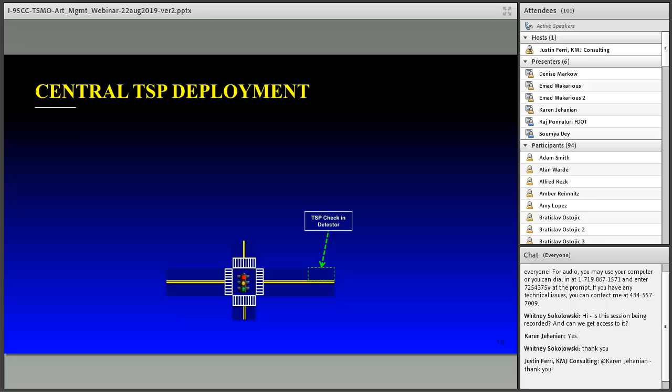The benefit of NYCWiN, which is a wireless network for TSP, is that it eliminates the need for instruction changes to the traffic controller, requires only GPS on the buses, and there's no real cost to implement TSP citywide.

Okay, I'm going to go through this little by little. We have the TSP check-in detector for each intersection. First, we have the TSP check-in detector, then the TSP check-out detector.

When the bus approaches the intersection, every bus, capable with GPS, connects with the transit server, which is a transit management center, via 4G, and says I'm here, away about whatever distance, 200, 300 feet from the intersection. Then the transit server connects with TMC, DOT TMC, and sends a request for TSP. TMC sends acknowledgement to MTA Transit, and during this process the DOT server sends through NYCWiN, connecting with our controller, which grants the request for either early green or extension green. All this happens within 2 seconds, maximum 2 seconds.

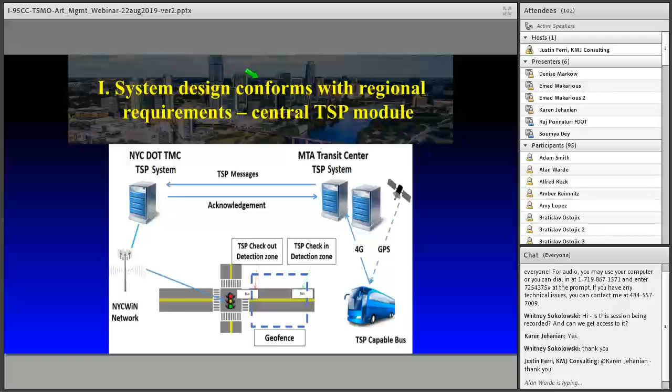So once the bus clears the intersection and clears out, as you see here, this is the full picture of all what I said before. All this happened within 2 seconds.

Okay, so moving forward here. We built a system engineering with a portion of New York City's sub-regional ITS architecture covered by the Transit Signal Priority Project. As you see highlighted in yellow, that portion we built in the system here, covering the TSP subsystem.

There's more detail here in the package describing the communication between New York City MTA server, New York City, and TMC. I'll have more details if anyone needs a link. We have a link for the whole system engineering project on the website.

Let's move forward. That's a little snapshot of a 60-second cycle length.

We can talk about the policy we built in-house. It starts from number 1 through to screen number 7. First, we start with TSP parameters and how we implement that.

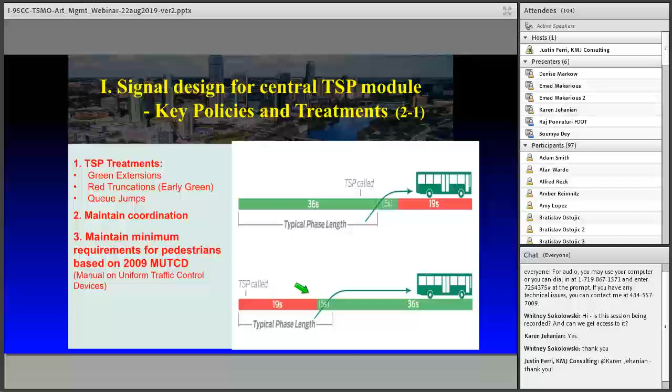There's a sample for a typical intersection with 60-second cycle length. The first graph shows extension green for 5 seconds, and the lower graph shows early green for 5 seconds. We maintain coordination and of course maintain minimum requirements for pedestrians based on 2009 MUTCD.

We also define the detection zone for each intersection. Those switches also play into the policy. If any roadway has 2 directions, it's first come first serve, and of course the TSP duration varies by intersection and time of day.

Okay, we can go quickly through the process of how we built the network and how we process the TSP. We start with network data, starting from aerial photos, physical inventory, and so on.

All of this is listed on the left side, and we also have bus data listed on the right side. All of this is important to build the network. So let's move forward.

Which software do we use? We use Synchro and we use Aimsun. Both are very important software packages we use for our project. Mainly Synchro, which builds the network.

We build an existing model, measure the level of service, queue, and all these factors, and at the same time we build in Aimsun.

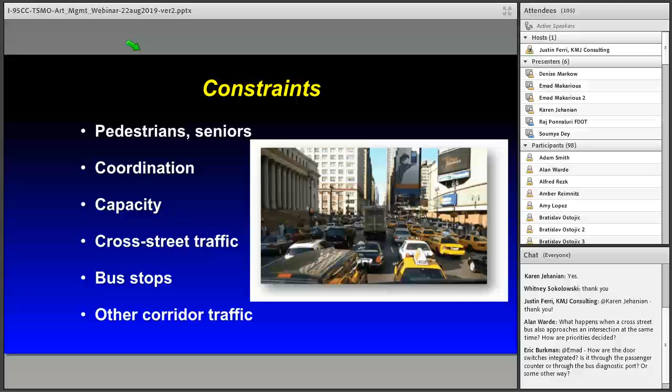As you know, New York City has a lot of constraints: pedestrians, seniors, coordination capacity, cross-street traffic, bus stops, and other corridor traffic which intersects with the main corridor.

After we process through the software packages, we have before-study and after-study reports. The before study is mainly the outcomes from the software, either Synchro or Aimsun.

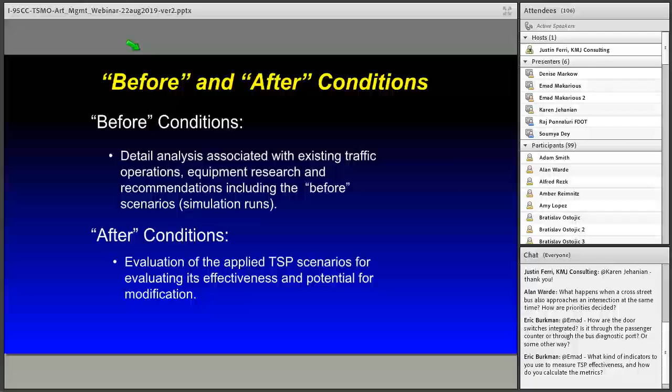For the after study, we do real data collection from the field based on bus travel time, and basically we turn TSP on and off during this process. It varies between 4 to 8 weeks of study during Tuesday, Wednesday, and Thursday, every week. After that, we evaluate the benefits from implementing TSP.

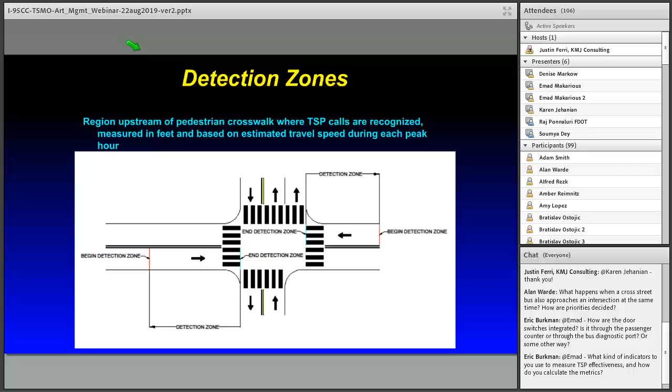We move forward here. That's a simple example - the detection zone is measured in feet based on estimated travel speed during each peak.

Let's briefly explain how the bus approaches. For each approach along the route, for each signal in the system, there will be a defined area called the check-in zone and the check-out zone.

So when the bus enters the check-in zone, it sends a request to the TMC saying, 'I'm here, I need TSP.' Within that detection zone, if due to traffic conditions the bus is still inside, it sends another request saying, 'I need a TSP extension.'

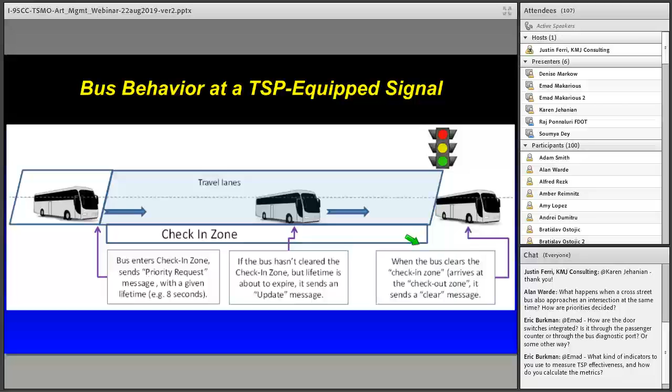Once the bus clears the detection zone, it's the check-out zone, so it sends a message to the TMC saying, 'I've cleared.' That means the TMC ends the extended green phase. This whole process happens within maybe 7-8 seconds.

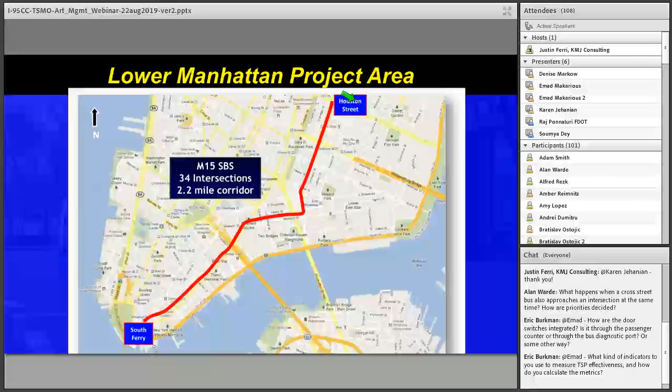The first project we did was in Lower Manhattan, about 34 intersections over 2.2 miles. It starts from South Ferry and ends at Houston Street - again, 2.2 miles.

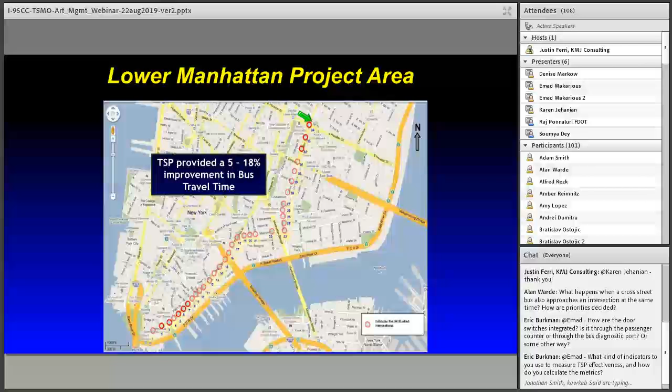We saw benefits between 5 to 18% improvement in bus travel time, over that same 2.2 mile stretch. We implemented TSP for AM, midday, and PM - about a 3 hour window for AM, about 2 hours for midday, and a 3 hour window for PM.

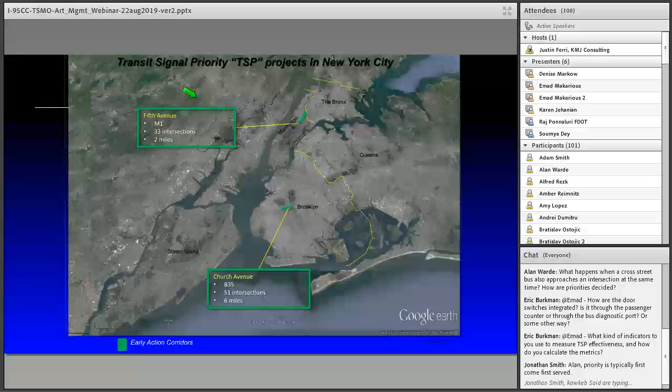This is another snapshot of early action TSP. We have another methodology we're using and testing right now. We've implemented it on 2 corridors shown in green.

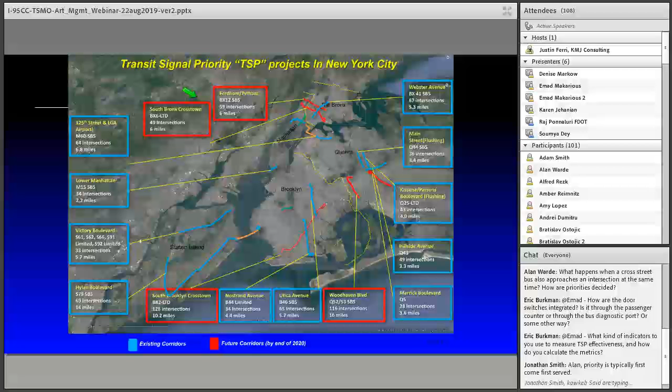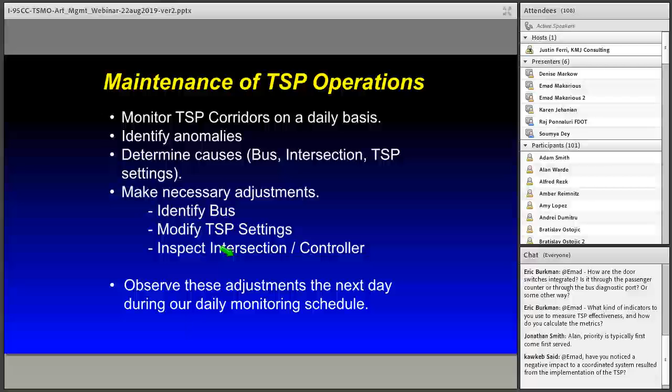We can touch base in the next couple of slides about how we maintain TSP operation. We monitor TSP corridors on a daily basis, determine if there are any issues regarding the buses, whether we need to modify TSP settings, inspect each intersection within the corridors, make changes, and we immediately see the results the next day.

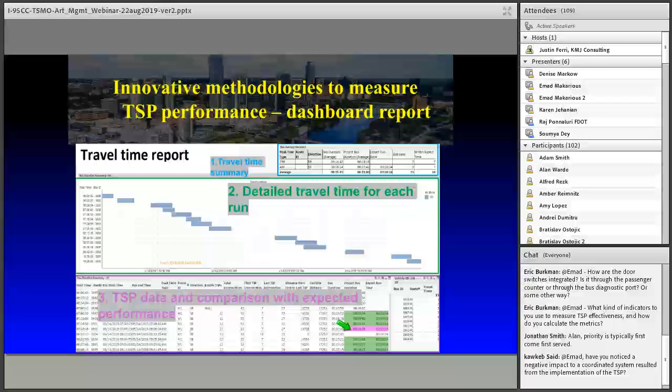How we see that - we check TSP data and compare it with the expected performance. And if we see something unusual like pink, we have to go and inspect that and see what's the issue with the controller or from the buses and so on.

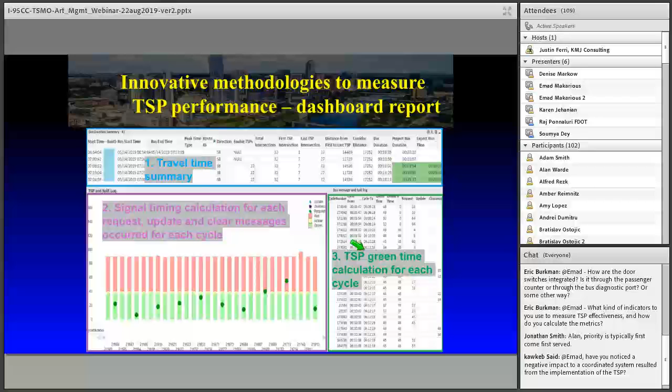So we're talking about sometimes data with over a million records. We have a consultant with a workstation. We monitor that on a daily basis, and how the TSP calculates. Here's also another report: TSP green time calculation for each cycle.

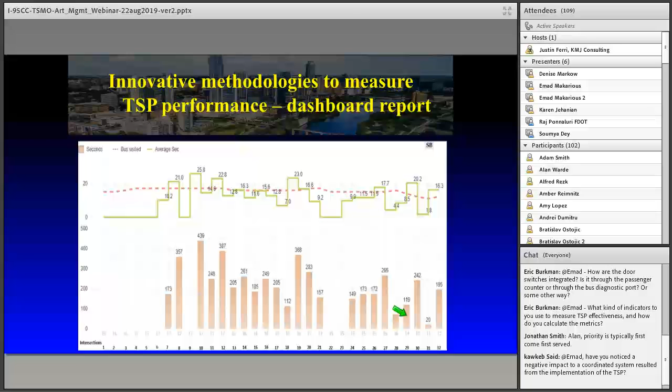Again, there's another snapshot of the report, as you see here, comparison between each cycle and each record, what happened for each record here. That's of course when the TSP was active, which was between 7 to 10 a.m., typically, and 12 to 2 o'clock, and between 4 to 7 p.m.

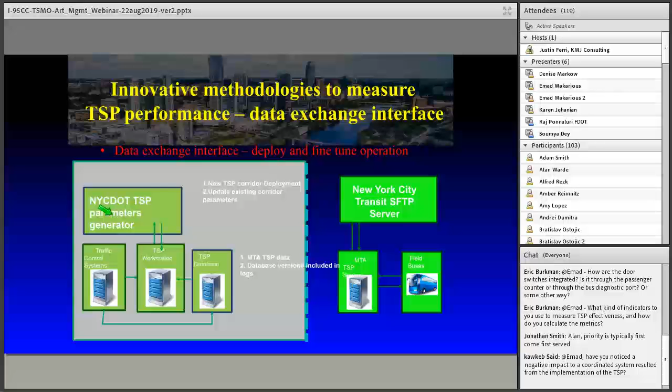That's another snapshot: TSP performance data exchange interface, and as you see here, how the communication between TMC - right, New York City TMC - and New York City Transit server, how the communication between the servers works. So it's very clear here.

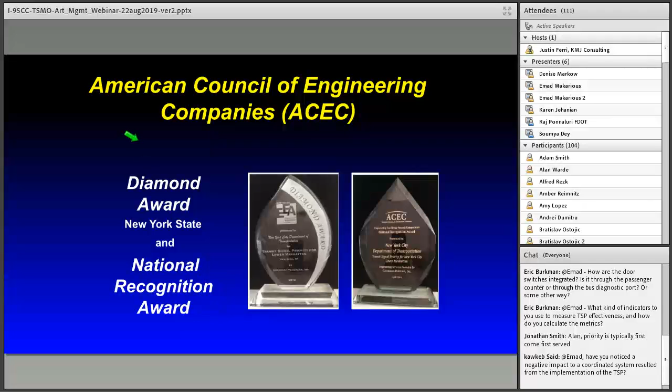And we see the benefit, as I mentioned before, varies between 5% to about 25%. It depends on the traffic, and also depends on the time of day.

And that's one of the awards we have, back in 2015, for American Council of Engineering Companies, and there's another from ITS New York, back to June 2015. With that, I finish my quick presentation, and thank you everyone for listening.

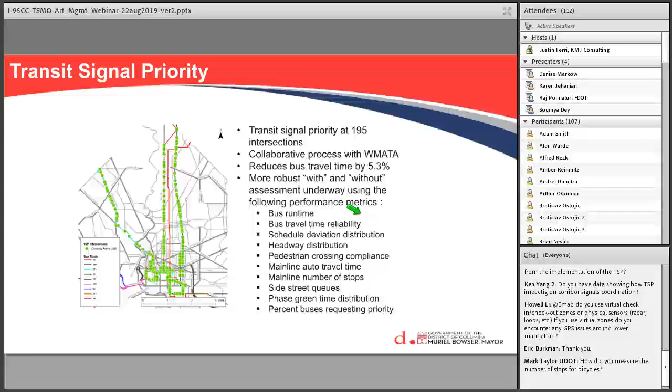So transit signal priority, I'll just touch on this because Emad has gone into great detail. So we have transit signal priority along 195 different signalized intersections. It's a collaborative process with our regional transit operator. And overall, we did some preliminary analysis and saw that our bus travel times reduced by about 5.3% along these corridors. And we are in the process of doing a more robust analysis.

And these are some of the metrics that we are using: the bus run time, travel time reliability, schedule deviation, et cetera. The other thing that we tested a few years ago was how effective is adaptive signal control in a dense arterial environment. And we tested this along 3 different corridors in Washington, D.C., Rhode Island Avenue, New York Avenue, and Pennsylvania Avenue. And so we did a before and after analysis.

And what this basically showed in a nutshell is that there were limited travel time benefits on the main line, but the levels of delay on the side streets and the queues were really unacceptable. And then there were issues with confusion with pedestrian crossing times and all of that. So we kind of shelved the idea and reverted back to our pre-timed signal operation.

So now let's talk about the second bucket, the lane management strategy. So the first thing that I wanted to talk about is a framework that we put in place for assessing the effectiveness of our current rush hour restrictions. So typically, these rush hour restrictions were put in place a long time ago. The travel patterns in the district have changed. 15, 20, 25 years ago, the district was mainly a destination. There was not much activity happening in the district, but now things have changed. So it's a very vibrant community.

So we wanted to see whether the rush hour restrictions that were put in place a long time ago are still viable. And if not, what kind of framework can be put in place to make an assessment on a corridor by corridor basis? So when you do the evaluation, it's basically a trade-off between mobility and access, right? So if you provide more lanes during rush hour, your mobility is going to increase, but at the expense of maybe access to your adjacent land uses.

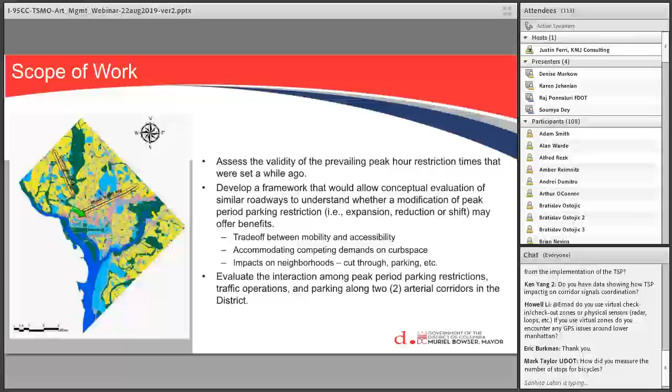So if you are not allowed to park on the curb lane, then the access to the adjacent businesses and other activity centers gets reduced. And it might have a spillover effect onto neighborhoods that abut these corridors, right? So you might see things like reduced parking availability for the residents. If the restrictions are too stringent, you might start seeing things like cut-through traffic. So those were the kinds of things that we wanted to bring into the evaluation process. And we evaluated 2 major corridors, Connecticut Avenue and Rhode Island Avenue, to kind of assess and create the framework.

So it was a 5-step process. We assessed the existing conditions, established the need for changing the restrictions, if any. We wanted to establish what acceptable operational thresholds are when we do the evaluation. We established how much we need to shift the restrictions by, if any. And then the other big piece is once we decide on a new time frame, if you will, for the restrictions, how do we deal with the transition point for the sake of consistency across the corridor. So this is kind of the basic framework.

So the existing restrictions during the morning rush hour are 7:30 a.m. to 9:30 a.m. So we did the analysis in 30-minute chunks to establish what the existing conditions are in terms of operations. And then based on the need, does it make sense to pull the rush hour restrictions, or in other words, start it earlier, or do we push it to a later time? So is 9:30 still good? Do we need to go to 10? Or the other question is if we pull it back to around 9 o'clock.

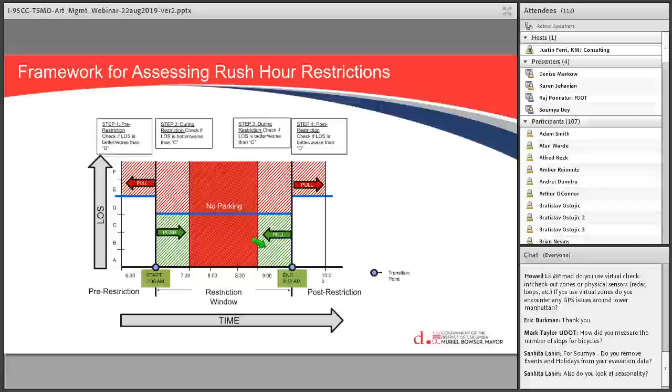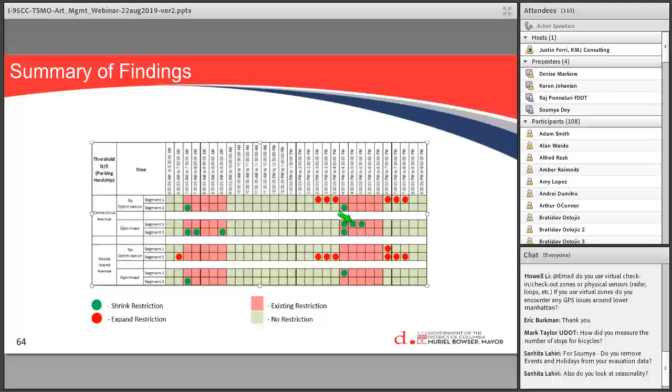But once you optimize the signals, then you open the possibility of probably reducing your restrictions during the PM rush hour for segment 1. So that's the kind of analysis we went through. And based on the analysis, we tried to create some policy framework, right? It takes into account what the different thresholds could be for our analysis, the availability of transportation, the potential for neighborhood cut-through traffic, and the parking supply and demand in the neighborhood. And then based on that, we had some policy recommendations on what strategies we could put in place.

So that is it in a nutshell. We have a TRB paper on this, and I can direct you to our final report if somebody wants more information on this project.

So the second one that I wanted to talk a little bit about is the bus-only lane project, the pilot that we launched this summer. It was done on H and I Streets in Northwest DC. And what's interesting is that it's a very heavy bus corridor between H, I, and K Street. They account for about 40% of the bus riders in Washington, D.C. So very heavy corridors. H and I are one-way pairs. And so we implemented rush hour bus-only lanes on H and I Street.

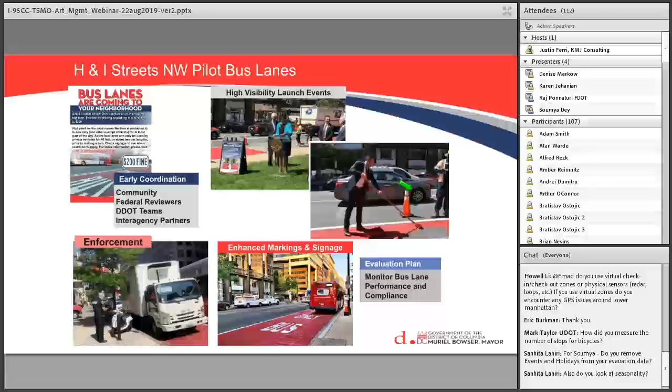And we had significant outreach. The mayor kind of launched the project. We coordinated with our enforcement partners. So it was a very high-profile project. And again, remember the number that I gave you, that by 2032, we want to get to 75% non-SOV mode. So these are the kinds of strategies that we are putting in place to incentivize other modes of transportation.

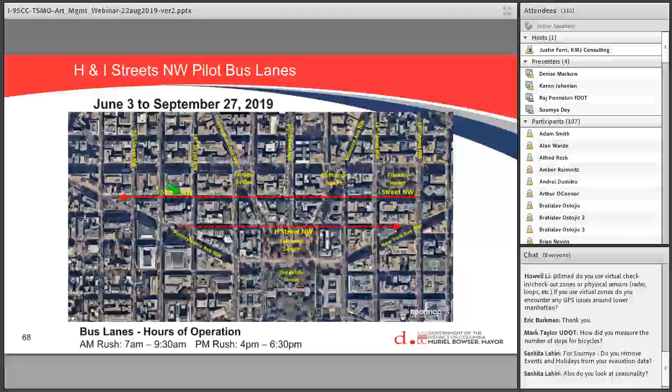And the preliminary results are a mixed bag. For I Street, especially during the PM rush hour, there has been significant improvement in bus operation, about a 17.9%, 18% improvement. So that's pretty significant. But what was surprising was that on H Street, the bus performance, the travel times and speeds actually decreased. And then we started peeling the different layers of the onion, and we saw that what was causing this was heavy right turn movements, especially on 15th Street and 17th Street near the White House, that was impeding the buses on the bus-only lanes.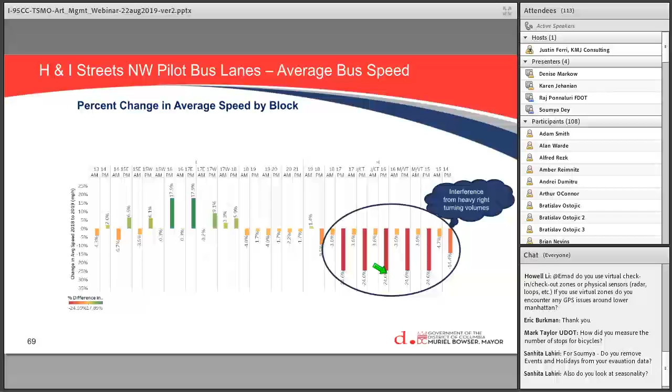What was interesting is, so what changed, right? So before the bus-only lanes, the bus operators knew what the patterns were, and they were using the second lane to make that through trip. But with the implementation of bus-only lanes, they had this mindset that they needed to stick to the bus-only lane, and they were getting caught up with all the right turns. So there are some strategies that we are trying to put in place to alleviate that problem. And in terms of travel time reliability, I think I Street did pretty well, and the reduction in travel time reliability, or the standard deviation, was mainly driven by the friction with the right turns.

So the lessons learned, the key issue that we are trying to resolve right now is the right turning issue. There was an informal bus layover on one of the bus lanes, so we are in the process of relocating that. And then obviously, enforcement is a big piece of this. So we are trying to minimize the encroachments on the bus-only lanes by vehicles that are not supposed to be there.

So very quickly on reversible lanes, we do have reversible lanes in Washington, D.C., but we are restricted in terms of what kind of signage we put up. We are not allowed to put up overhead lane control signs. So when I shared the experience of Washington, D.C., you have to take into account some of the constraints under which we have to operate our reversible lanes.

So we looked at reversible lanes in terms of three basic metrics. One was utilization of existing infrastructure, right? So you have 4 lanes, you have 7 lanes, you try to reallocate the pavement or the capacity based on your demand. So from that perspective, I think reversible lanes do very well.

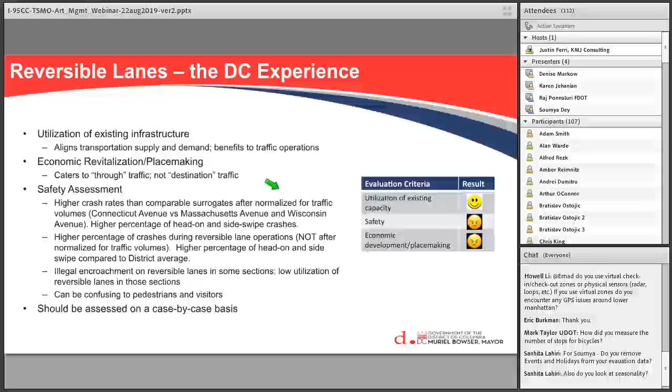But the biggest drawback was because of the constraints that we have in place in terms of sign placement, the safety of reversible lanes was not as high as compared to surrogates or a control corridor. They had a higher crash rate. So again, we have an ITE paper on this. I will be happy to direct you to that if you want more information on reversible lanes in an arterial setting.

And then the last strategy that I wanted to elaborate was curbside management. I know I'm short on time, but I'll quickly talk to you about a curbside dynamic pricing project that we did in the Chinatown Penn Quarter area. What we did here was use technology, economics, and advanced analytics to improve the on-street parking experience for customers. And the way we did that was by pulling 2 different policy levers. The first one was the duration for which you can park, and the second one was the amount of money that you need to pay to park. And we provided real-time parking availability information to customers so they know where the open parking spaces are.

So when we started out, we started with a citywide rate of $2.30, and every quarter we made price adjustments based on supply and demand. And after 7 price adjustments, the spread is now between $1 and $6.50 in the Penn Quarter Chinatown area. So that's the pricing lever that we pulled.

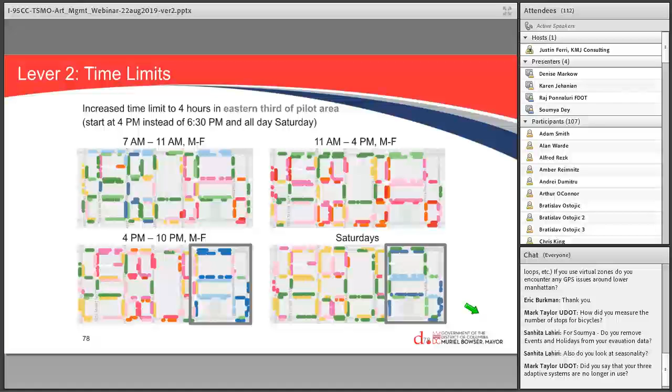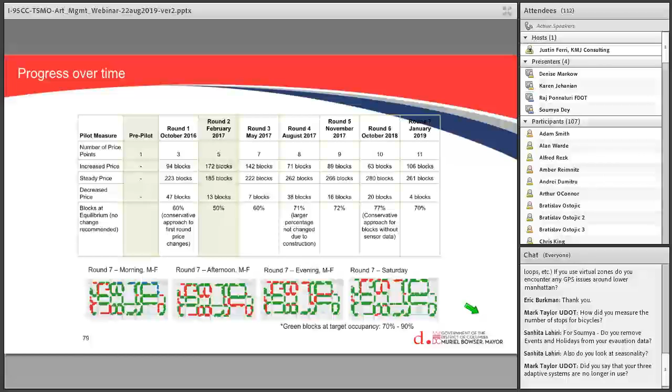The time lever that we pulled was that in the eastern part of the study area, during the evenings and Saturdays, there's lots of excess parking capacity. So to incentivize use of that space, we increased the time limits here from 2 hours to 4 hours. And as a result, we actually saw that people were parking there for longer duration and the spaces were better utilized. So I'll skip this.

So what did all of this do, the policy levers that we pulled? We collected data in 2 ways on how long it took people to find parking. The first one was a survey. We did a before and after survey, and based on the survey, people told us that it took them 5 fewer minutes to find an open parking space in the Chinatown area.

The second one was automated. We had about 60 Bluetooth sensors, and based on the track of the vehicles, we could tell whether they were circling around the block to find an open parking space. So based on that analysis, we saw that the time to find parking reduced by about 3 minutes.

The other thing that we found was that in high occupancy blocks, the turnover increased about 10%. So people were coming in and leaving the parking spaces earlier. And in low demand areas, the eastern part of the study area, people were actually staying longer and utilizing those spots more than they had done before.

In the loading zones, double parking citations fell by 55%, and the amount of violations in loading zones fell by 43%, substantial changes. And double parking in general in the study area decreased by a larger amount than it did in the control area. So it had a pretty positive impact.

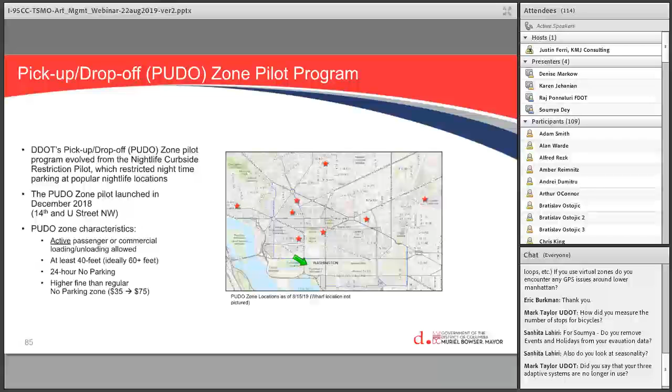And the last thing in the curbside bucket that I wanted to talk about was passenger pickup drop-off zones, PUDO zones. The demands on the curbside have changed over the last 5-6 years with the penetration of TNCs and other modes of transportation. So we started off with pickup drop-off zones in nightlife areas where we restricted parking and used the curb space only for pickup drop-off. The lessons learned there enabled us to launch specific pickup drop-off zones in about 9 locations throughout the city based on demand. And our goal is by the end of the year to get to about 25 pickup drop-off locations across the district.

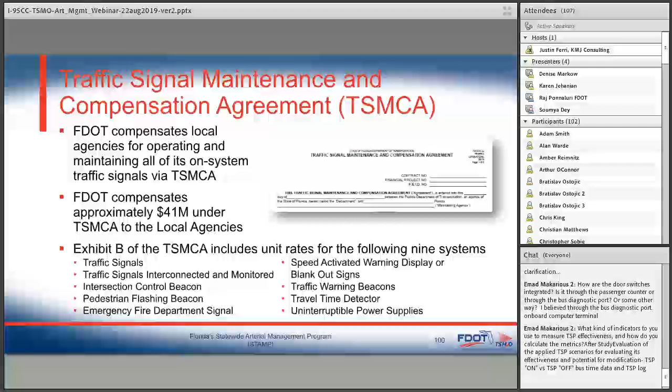50% of the traffic signals should be reviewed and maintained every single year. In other words, within a 2-year time frame, every single cabinet should be opened and the controllers evaluated to make sure they're actually working the way they should. So there's 100% maintenance compliance required within a 2-year time frame.

In return, Florida DOT has taken up a lot of responsibility on its shoulders, much more than in the past. For instance, instead of the local agency chasing insurance companies in the event of third-party damage claims, Florida DOT has taken responsibility for helping the local agency by compensating them as soon as we receive the report, with the police report, photographs, invoices, and all the good stuff. We pay them ahead of time, and then Florida DOT's claims office pursues the insurance companies to get reimbursed for that amount.

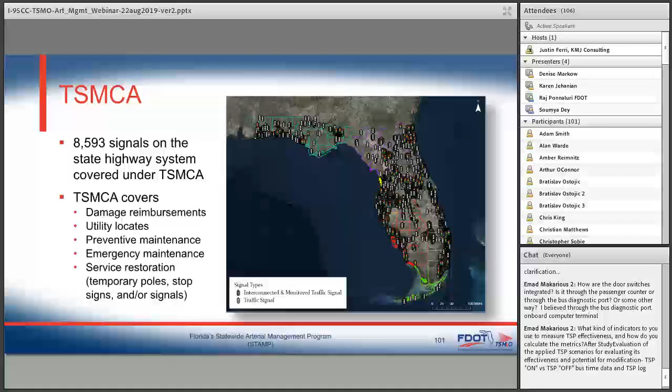I'm not saying we'll get reimbursed every single time, but we do our very best, and we're usually very successful because we created a procedure to make sure all the necessary documentation is available. So service restoration is a very important element. Preventative and periodic maintenance have been spelled out within the TSMCA.

Training is another big element we hear about from many local agencies and our district offices. Originally, when we developed this traffic signals training several years ago, PTAC helped us with one of the first trainings. Later on, our general engineering consultant helped us advance that traffic signals training.

We also developed a training module on adaptive signal control technologies through our STAMP consultant. We made the traffic signals training into a CBT, a computer-based training. I'll provide that link later on.

The trainings are also going well beyond traffic signals and adaptives. We are actually developing a training module on systems engineering as we speak. Our goal, as you can see, I hope it's obvious now - we are trying to hit on every element we can think of to provide the necessary tools that are out there to the local agencies.

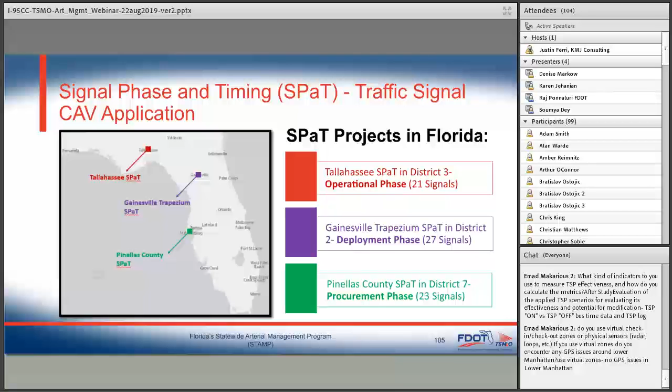So there's a lot going on right now. The reason I brought up this SPaT slide is because I want to emphasize that our connected vehicle program is coming directly out of the STAMP action plan and the TSMO program. We're not trying to create anything new other than saying that leveraging emerging technologies with connected automated vehicles is the best way to move the needle in terms of improving safety and mobility.

So that's the ATSPM deployment. I could have had a better slide, I know. We do a lot of coordination with our district offices, and I think I'll leave it at that for now. Thank you so much for your time and attention.

We really appreciate it. Before I close, I want to thank several other colleagues on the line. We have Dr. Hardy and Dr. Priyanka Alluri from FIU, who help us significantly with our research efforts. Hazem is here from Orange County, one of our best partners in the state. I see John Hibbard, one of the national leaders in connected vehicles. Omar Meitin, District Traffic Ops Engineer in District 6. And Shayla Khalil Mardi with our TMC in District 4. So at least those are the names I could find on the list. Thank you all for being here, and we appreciate all you do.

Denise, I turn it over to you now. Thank you, Raj, thank you very much. I know that Florida has a great STAMP plan. I saw it about a year ago, and I'm glad that we're able to bring it to the group.